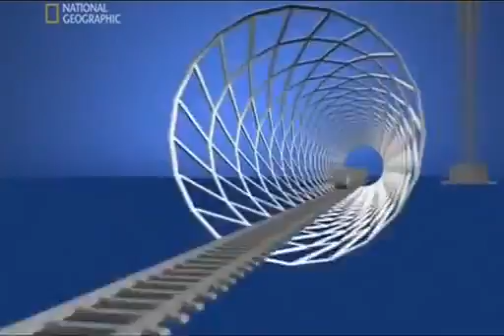In 1994, construction begins on what is planned as the world's tallest and most luxurious hotel. The pressure is on from day one. With the eyes of the world watching, no one on the project will want to disappoint this particular client.

Sheikh Mohammed bin Rashid Al Maktoum, Dubai's crown prince, is the visionary behind this amazing building. The project is his response to the economic time bomb his country confronts. As his close advisor, Sultan bin Sulayem knows all too well. He knew that we don't have oil. He knows that oil is going to end someday. And they have two choices: either go and do something about it and find other alternative ways to sustain the life for the people of Dubai, or sit waiting for help.

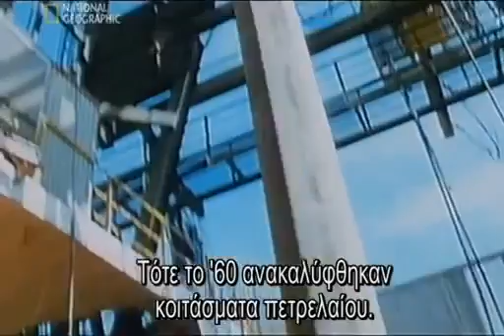Only 50 years ago, Dubai was a dusty backwater, home to pearl divers, coastal traders and Bedouin. Then, in the 1960s, prospectors discover oil. The sudden injection of billions of petrodollars transforms the sheikhdom. But geologists predict the oil boom will be over by 2016. The good life could end just as quickly as it began, when the wells run dry.

The answer to Dubai's economic survival lies in its geography. This tiny emirate, less than twice the size of London, is in the remote Arabian Gulf. But Dubai has three untapped assets: sun, sand, and sea. Facing future economic meltdown, Sheikh Mohammed makes a crucial decision. He will turn his country into one of the world's most exclusive holiday destinations, a playground for the rich on the Arabian Gulf Coast. The Sheikh needs a luxurious centerpiece to launch his country into high-end tourism.

He stakes what some speculate as over $1 billion on the tallest, most lavish hotel in the world, with a unique 7-star reputation, the Burj Al Arab. I think it was very important to put Dubai on the map of the world. There's no hotel like this hotel. It takes guts, and Sheikh Mohammed has a lot of guts.

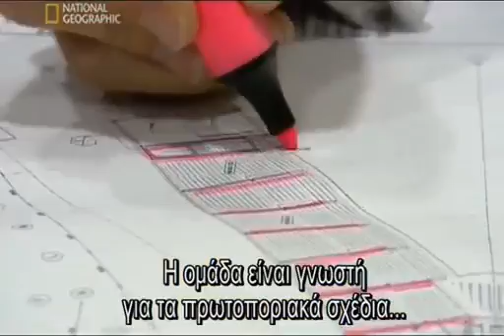The Sheikh's courage is clear from his choice of architects, a radical young team from Britain, brave enough to take up the challenge, but very short on experience. They are led by Chief Architect Tom Wright. We had an average age of 32, not a grey hair between us, and none of us had gone over about 15 stories. I was quite staggered by the scale and the immensity of the project. Tom Wright and his colleagues have a reputation for innovative engineering, but they're more used to designing schools and offices.

But Dubai is a place where connections can make all the difference. Through a contact in the ruler's office, the team gets its break. Sheikh Mohammed agrees to a meeting and is so impressed with their initial concepts, he awards them the contract. Now Wright must turn his sketches into a design so remarkable, the building becomes a world-renowned landmark. We had many sleepless nights worrying that the building we'd designed wouldn't turn out to be at all iconic.

Wright knows he must push his design to the limits. A building only becomes an icon when its form is simple but unique. We decided that if you could draw a building simply with a few strokes of a pen, and it was instantly recognizable as not only the building, but the place, Egypt in this case, you'd created something that was iconic.

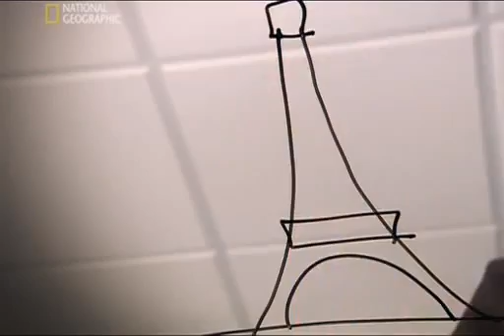So if you consider the buildings in the world, there are probably no more than 10 maximum that have actually achieved this status. Australia, Sydney Opera House. As with all these buildings, it's usually just the first couple of lines that actually make you know exactly where the building is. Paris, and you have to put a flag on the top. Can Tom Wright and his team compete with the likes of Gustave Eiffel? This is a once-in-a-lifetime challenge.

All the brainstorming pays off when Wright finally has his eureka moment. We were sitting there having a beer, watching the modern sailing yacht come out of the Dubai Offshore Sailing Club. You think of excitement, you think of exhilaration, and we went, hey, this must be the one. The form we came up with is very simple, and within a few lines, I think you can see that it has all the elements of an iconic building. It's simple and instantly recognizable.

The concept immediately catches the Sheikh's imagination. A sail billowing in the wind has deep meaning for the people of Dubai with their seafaring heritage. To complete the nautical image, Wright wants the structure to rise out of the water like a massive yacht.

But this will require an island as a base, and there are none. Wright's undeterred. He proposes they build an island specifically for the hotel, a first for Dubai. Constructing the hotel out at sea will significantly add to the risk and cost.

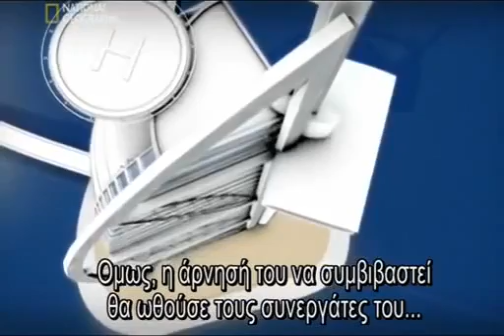By early 1995, the construction team is hard at work on Phase 1, building a low-lying island. But the inexperienced architects are about to get a taste of Dubai's extreme weather. April the 27th, a powerful storm known as a shamal sweeps across the Gulf, hitting the coast with a vengeance. A set of construction barges lie in its path, each laden with 10,000 tons of rock.

The architects have planned for all weather conditions, but the storm's intensity still shocks Simon Crisp. We had 3 or 4 metre waves bashing onto the beach. To see the waves coming in like this was really quite a wake-up call for us.

One huge barge breaks loose and slams into the mainland. The team realizes the damage this kind of storm could inflict on their island hotel. We had a really graphic example of how powerful the Gulf of Arabia can be when it's angry. The architects' decision to expose their structure to these forces could have serious consequences. The engineers will have to struggle to produce a low-lying island capable of resisting nature's fury.

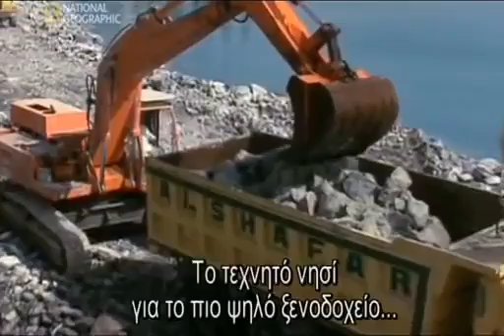The man-made island for the world's tallest hotel has hit a critical stage just 5 months into the build. Dubai's Sheikh Mohammed is depending on this project, the Burj Al Arab, to convert his country from oil producer to top-class tourist destination.

But a debate rages over the island's height. Architect Tom Wright wants to make it low to give the impression of a sail rising out of the water. We argued a lot about the height of the island. From a design point of view, I wanted people to be close to the sea.

From the start, he's gone head-to-head with engineer Mike McNicholas, who's responsible for the island's safety. So I wanted the island as low as you possibly could, you know, skimming the sea. I'm coming from the other end, needed to make sure we were protecting the island. McNicholas's worst fear is that waves breaking over the island could damage the hotel or even drag guests into the sea.

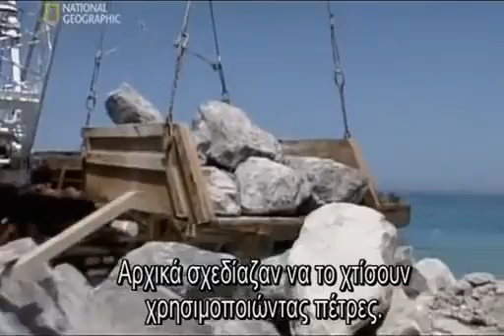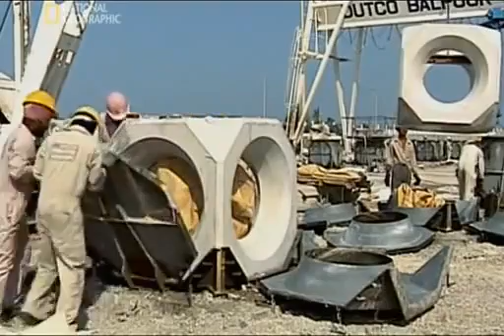Initially, the engineers planned to build the island using rocks. They are available locally and the technology is proven. But Wright rejects this. A rock island would have to be far too large to repel the sea safely. To keep the island low, McNicholas experiments with pioneering concrete blocks designed to reduce the impact of waves.

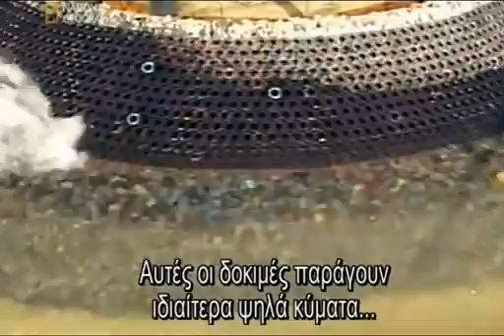But no one in the Gulf has ever used these blocks before. I had to insist with the team that we carried out tank testing. It was the only way we were going to be sure that the island would be safe. These tests replicate the power of the tallest waves that can occur once in 100 years and sends them crashing into a series of differently configured models. 3 weeks of testing prove the hollow blocks will work.

The construction team builds the island with steep rock slopes, then covers them in concrete armor to absorb the force of the waves. These ingenious blocks work like a sponge. As the wave hits, the water passes inside the space and turns around on itself. The force is largely dissipated.

With the engineers' help, architect Tom Wright has won his battle for a secure island that rises only 7.5 meters above the waves.

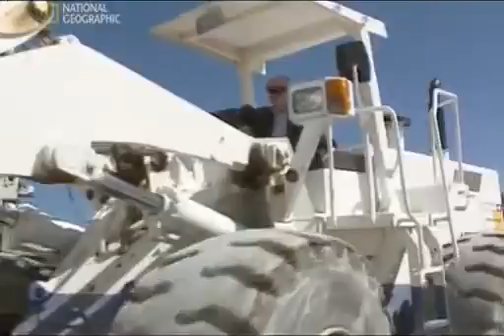Now the team begins the second stage of construction. In the center of the island, construction workers drive huge lengths of steel 20 meters into the ground. This creates a triangular steel wall known as a cofferdam, which will become the outside of the hotel basement once they excavate the sand from inside.

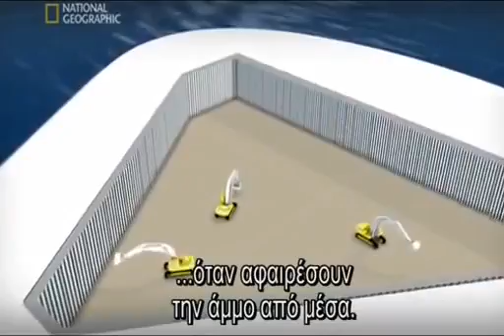But removing the sand could be dangerous. That was a real challenge for us. It's sleepless days and nights, 7 days a week, working out how we were going to stop the seawater coming into the structure, how we were going to stop the seawater coming around our structure from beneath and flooding it.

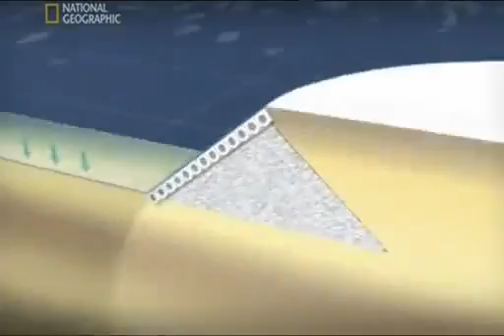The weight of the sea is a huge force on its bed. This pressure forces water through the sand and threatens to flood the artificial island from beneath.

To keep the sea out, McNicholas injects liquid cement into the sand to seal off his steel wall from below. But as the sand is removed to form the basement, there's less and less weight to hold back the force of the sea. The cement seal is going to be tested to the limit.

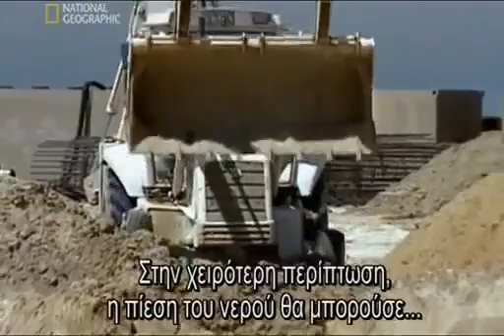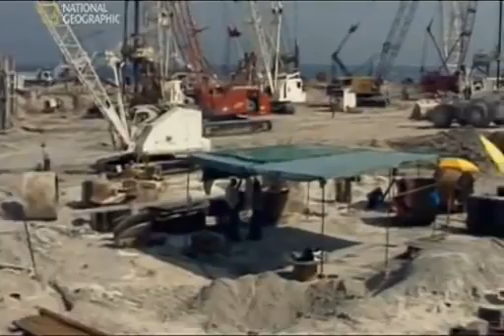In the worst case, the pressure caused by that water movement could have blown the whole bottom of the excavation like a champagne cork. If McNicholas's calculations are wrong, the excavation could be swamped, killing hundreds of workers. But he stands by his design.

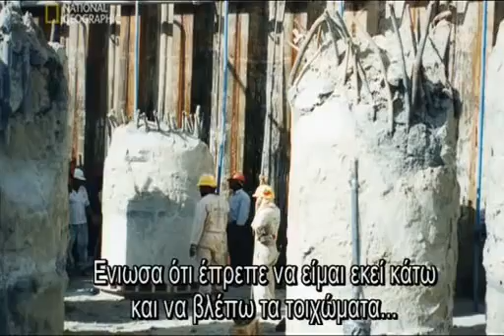With the cement seal in place, the excavators begin to remove the sand. As the man responsible, he's not going to let the workers face the risk alone. I felt I had to be one of the first guys down at the bottom of the excavation, looking up 10 meters above myself, thinking, each side of this cofferdam is 7,500 tons of sea pressure pushing in.

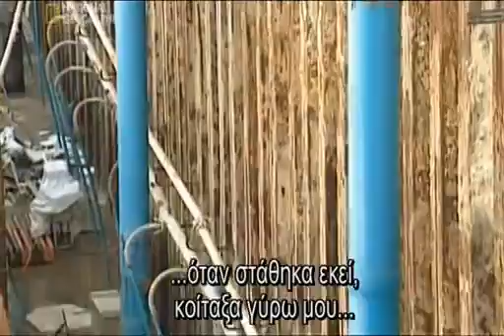When put to the test, both wall and seal hold firm. One of the probably proudest moments of my career was being stood on that excavation and looking around and seeing the steel wall there surrounding me and thinking, we are holding back the sea. My design worked.

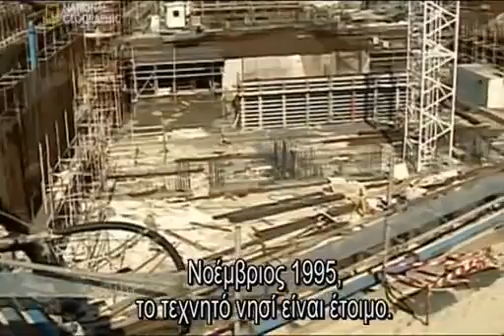November 1995. The artificial island for the tallest all-suite hotel in the world is now complete. The construction team starts phase 3 of this one-off project, the foundations. The support needed for any skyscraper is vast.

But the location of the Burj Al Arab presents an added challenge. It's never been done before to build something like this on reclaimed land. We're talking about a 300-metre high tower on a man-made island in 6 metres of the Arabian Gulf.

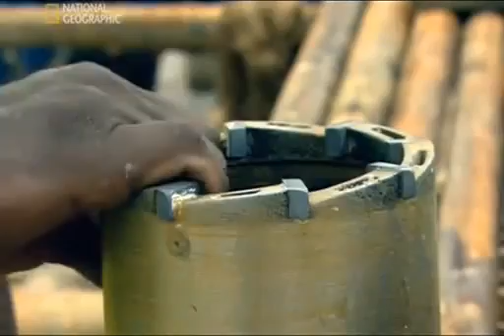The problems multiply when the results of earlier core tests reveal bad news. The team searching for bedrock drilled deep into the seabed. But even a full 180 metres down, there was no solid rock.

This will make their job tougher, but the architects remain defiant. The average person would think we're crazy to build something like this on sand, let alone out in the water. How will this 300-metre structure stand firm against earthquakes and winds of close to 150 kilometres an hour when its foundations depend on nothing more substantial than sand?

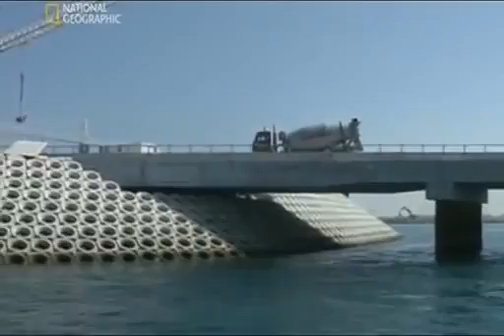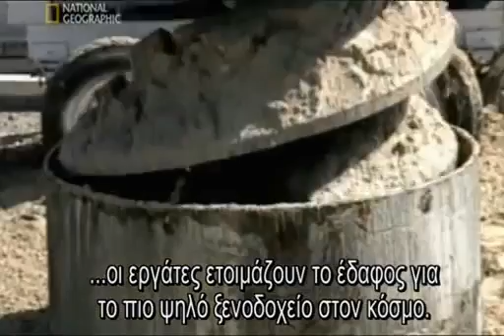On an artificial island 270 metres off the coast of Dubai, construction workers are preparing the ground for the tallest hotel in the world, the Burj Al Arab. But there's no bedrock beneath the site to support the foundations for a skyscraper.

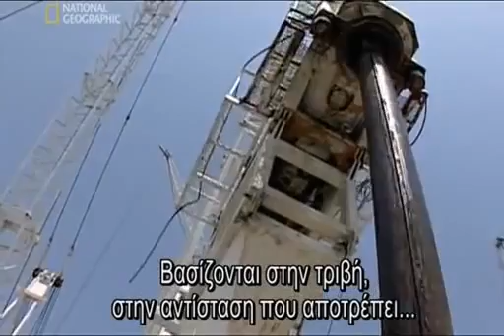The architects have a plan. They want to support the Burj using steel-reinforced concrete foundation piles drilled deep into the sand. So what's to stop the whole structure from just sinking? They are relying on an effect known as skin friction, the resistance that stops two rough surfaces slipping past each other.

Skin friction is all about the contact between the sand and the surface of the pile. And the longer the pile, the further in the ground it is, the greater that effect. I'm going to demonstrate it now by whacking it in. You'll see it starts to move quite quickly with the first few impacts. Now it's starting to stiffen up a bit, even though I'm not hitting it any harder or any softer, and the skin effect is starting to really kick in here.

Once the friction between the post and the sand around it equals the load of the hammer, the post comes to a halt.

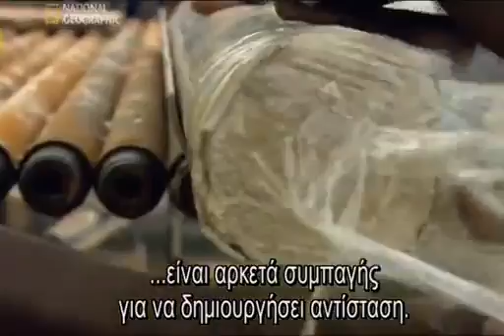The geography of Dubai gives everyone reason for concern. It lies within range of a major fault line, so this soaring megastructure could be vulnerable to earthquakes.

In June 1964, a 7.5 magnitude earthquake hits Niigata in northern Japan. Because the area is built on sandy silt, the tremors flip over entire apartment buildings. This isn't normal earthquake collapse. It's a devastating phenomenon known as liquefaction.

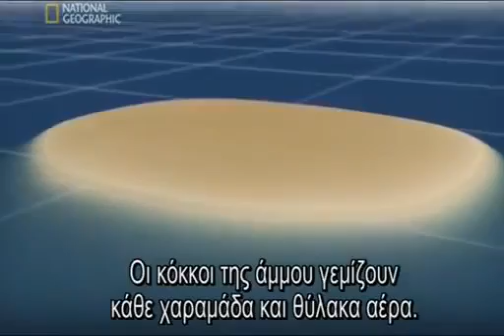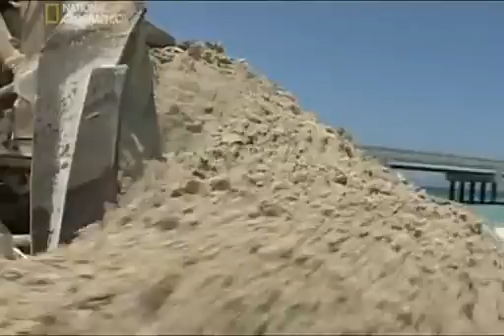As grains of loose sand shake, they fill up any air pockets and compact, taking up less space. The ground stops behaving like solid earth and acts like a liquid. On shifting sand, any building could simply topple.

When the results of the drilling tests return, it's good news. Deep beneath the site, they find compacted and calcified sand. Liquefaction is not a threat.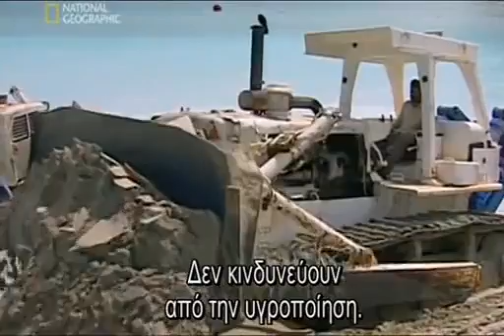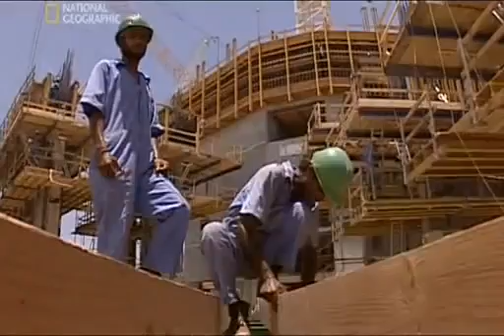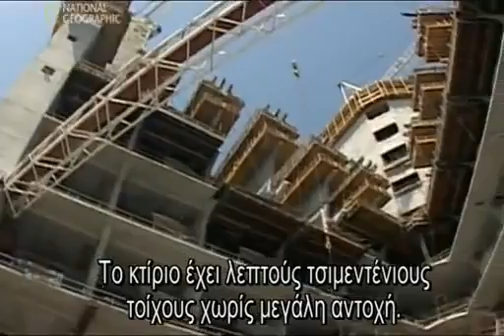This building had to stand up to the worst that the Gulf could throw at it. The hotel itself has slender concrete walls, not capable of withstanding the elements alone. To hold them firm against high winds and earthquakes, the architect devises a visually stunning solution.

A gigantic steel structure outside the main building, known as an exoskeleton. A series of vast diagonal trusses tie two huge steel bows to the concrete core at the back of the building. Wright's design will make the building unique.

But his giant diagonal trusses will make life hell for Anthony McCarter, the engineer who has to make them work. Those trusses gave me 4 months of heartache, sleepless nights, worries, anxiety.

They must be incredibly strong to tie the exoskeleton together. But aesthetics are just as vital. It was critical that these diagonals were very, very elegant and also very beautiful as they're so visible.

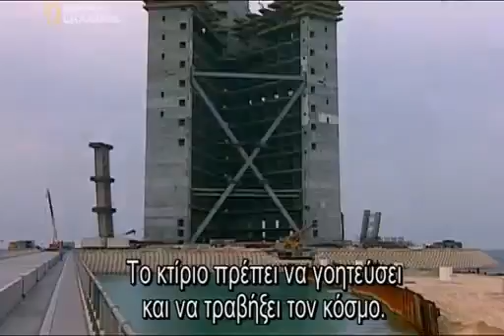This building has to wow the world and make Dubai a must-stop destination. Wright's not about to compromise. I used to go to Tom with option after option. I remember one particular occasion where I had 7 options and he went, no, no, no, no good, no good, no good.

Eventually, McCarter finds a form that works structurally and is graceful enough to fit Wright's vision. But this in turn causes nightmares for Malcolm Murphy, the chief contractor. It's okay for the architect to draw pretty pictures, but we have to build it.

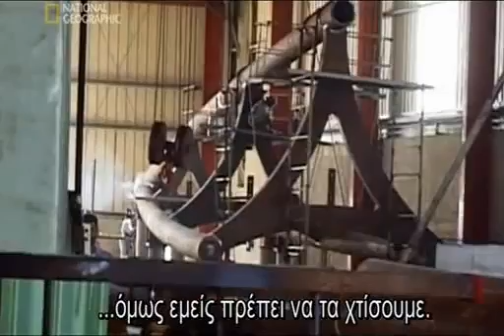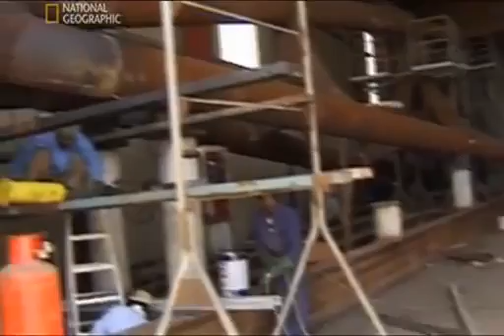He finds a factory just 15 kilometers from the construction site capable of welding the huge diagonals. Each one is longer than the Airbus A380 Super Jumbo and heavier than 20 double-decker buses. Welding these complex forms in the factory is the easy part.

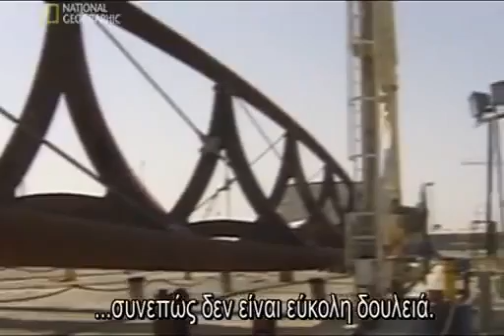Transporting them to the site is not. With each truss weighing in at 165 tons and reaching a staggering 85 meters in length, it's no easy task. And the challenge is to do that. It's just unbelievable.

No one has ever transported anything this size before in Dubai, but Murphy's not going to be beaten. He brings in one of the world's largest heavy lift transporters, a beast with a total of 80 wheels. It makes the slow journey to the construction site at an average speed of around 6 kilometers an hour. Police must close roads and remove traffic lights to allow this convoy through.

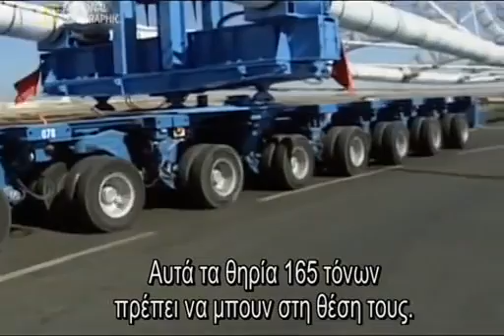When they finally reach the site, the contractors face their next hurdle. These 165-ton beasts have to be lifted into position. The architect refused us point blank to position these things in 3 pieces, which we wanted to do originally. And he said, no, aesthetics, I'll not let you weld up there.

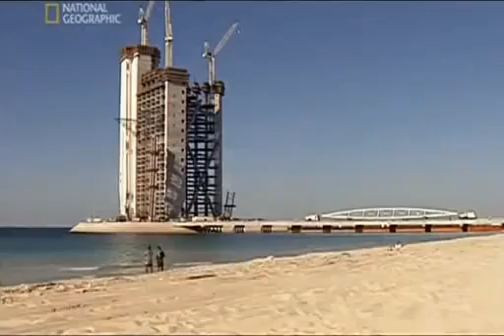He has to find a way to lift the trusses in a single piece to a height of almost 200 meters, twice the height of the Statue of Liberty.

We had to go away and think of an idea how to actually lift these monsters up. We had 3 big monster cranes in there, and even they weren't big enough to lift the diagonal trusses.

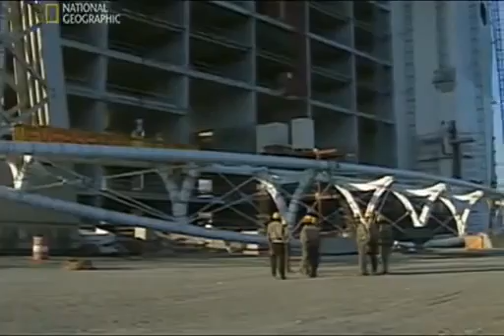Murphy must look further afield for a solution and brings in specialist lifting gear from Singapore. His team sets up winches, like those used on offshore drilling rigs, high on cantilever frames 15 meters from the building. Cables with a breaking strength of 225 tons are attached to the end of the truss.

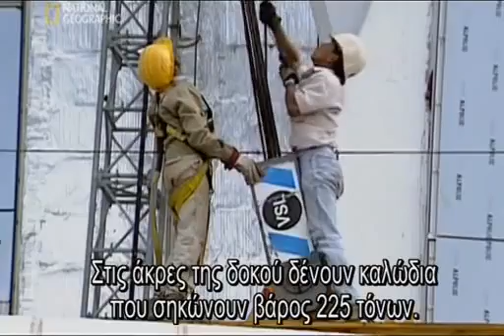I can assure you we were very, very nervous that morning when we lifted the first one. 30, 40 guys had sleepless nights that week, getting ready for that first lift.

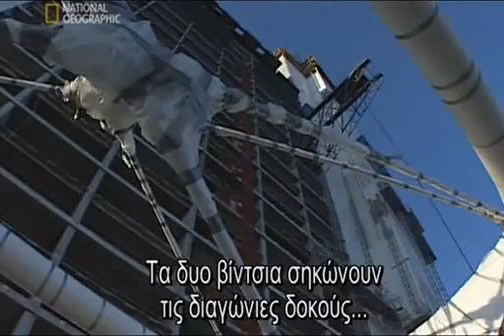The 2 massive winches take up the strain and then painstakingly raise the diagonal truss little by little up the side of the building. It's all going to plan.

Murphy and his team have solved the lifting dilemma, but these trusses have a sting in the tail. They need to fit into place with pinpoint accuracy. But Dubai's climate means temperatures can vary by as much as 14 degrees in a single day, and this will make the trusses expand and contract dramatically.

The problem's known as thermal expansion. The steelman's nightmare in the desert, working at 50 degrees C. Steel expands in the heat and contracts when cold.

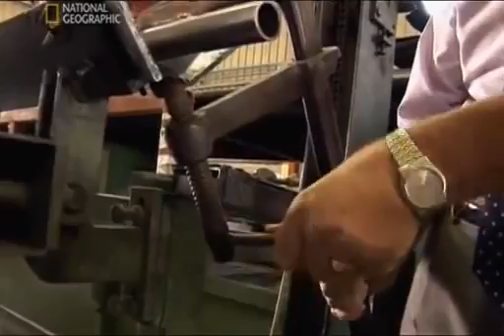Okay, chaps, light up. We're actually going to heat the steel up now, which is going to give you an idea of what temperatures we're working in the desert.

Heat makes the steel molecules move faster and further, and this 15-meter tube actually grows in length. The difference is visible. What did I tell you? Steel does expand with the heat.

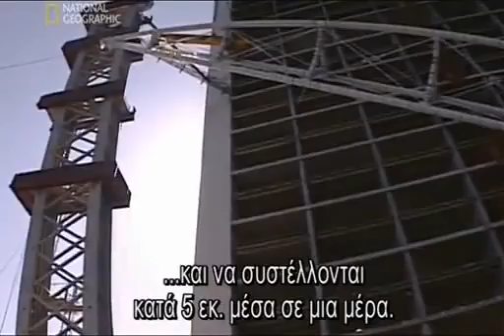The diagonal trusses on the Burj Al Arab could expand and contract by a full 5 centimeters over a 24-hour period. They will never fit their precise point in the framework without an ingenious solution.

The engineers thought about it, the structural fabricators, the steel fabricators, the architects, everybody thought about it, and it was actually one of the architects who came up with this great solution.

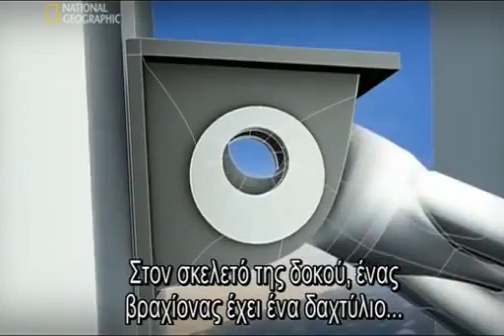On the frame of the structure, the fixing bracket contains a vast washer with its hole offset from the center. This swivels until it lines up with the hole in the diagonal truss. Then the cast steel pin, about 30 centimeters in diameter, is inserted through both holes, locking them together.

This clever device buys the team the crucial 5 centimeters of play they require for the installation, and the truss is now fixed securely in place.

When we got that pin in, we had those champagne corks flying. It was just unbelievable. But there's precious little time for celebration.

The first VIP guests will arrive before the millennium. This leaves the team less than 36 months to complete the entire project. Sheikh Mohammed's vision for the Burj Al Arab meant that it was needed yesterday.

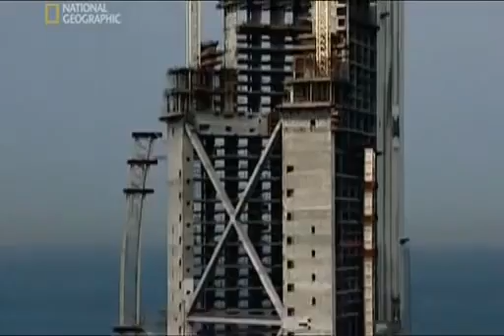January 1997. A colossus is emerging out of the Arabian Gulf. The Burj Al Arab is to be the tallest hotel in the world, the last word in luxury and a proud symbol for Dubai.

Architect Tom Wright wants the building to be beautiful. The steel sections of the exoskeleton that will support it must be as minimal as possible.

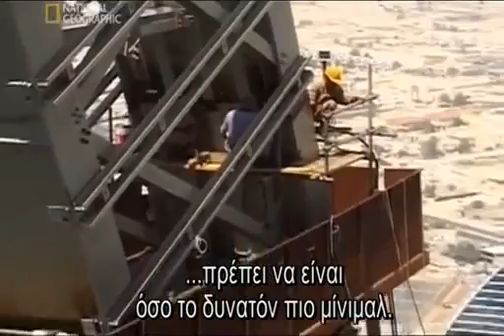The view from these $2,000 a night suites will have to live up to the price tag. When you're in the suite, looking through the windows, they are right in front of you, so they have to be exceptionally well detailed and well put together.

But this creates a dilemma. If Wright makes the exoskeleton too light, the wind's force at 300 meters above the Gulf could shake the building apart. Too bulky, and the elegant form of his yacht-shaped structure is ruined.

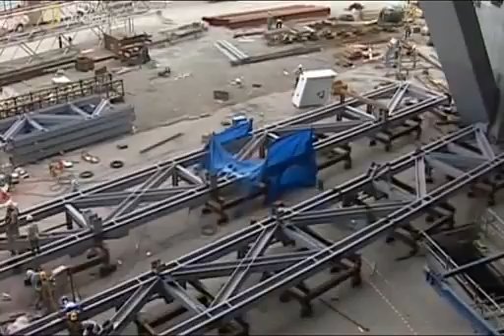Once again, Wright and the engineers, who must make his hotel safe, are on a collision course. When you're designing a building that is taller than the Eiffel Tower, and you've never done one before, you want to make sure that you've got it right.

This structure is so unusual. For the first time in Dubai's history, engineers decide to do tests in a wind tunnel.

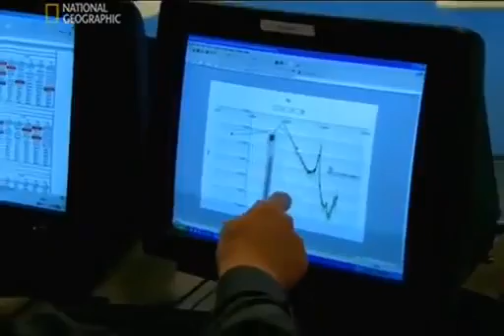Wind engineer Volker Buttgereit knows the Burj Al Arab is one of a kind. Before this building came along, most of the buildings in the Gulf were fairly orthodox shape. They were square, they were rectangular, they were nowhere near this scale. So doing a wind tunnel test for a building in those days in the Gulf was almost outrageous. But for this extraordinary structure, it's essential.

The wind tunnel simulates the wind effects of the Gulf around this 1:50 scale model. This building has seen some pretty severe loads, almost twice what it would see in London. We measured suctions which were the order of the weight of a car hanging off, trying to suck the panel off the building. So that's quite something.

The wind tunnel throws up results that could threaten the entire exoskeleton. When we first saw the design, there was immediate concern about vibration due to something called vortex shedding. Vortex shedding is an engineer's nightmare. Certain wind conditions blowing over sharp edges on the steel structure can create miniature tornadoes. These set up dangerous vibrations that can shake a building to destruction.

Which is exactly what happened to these massive cooling towers in Ferrybridge, Northern England in 1965. The engineers must find a way to protect the Burj Al Arab.

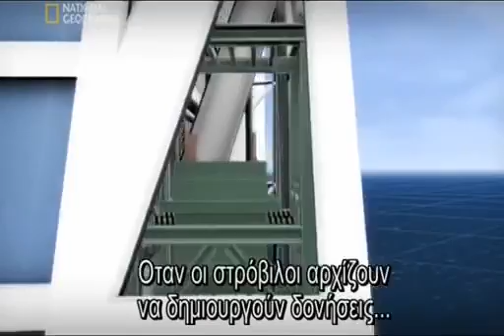They turn to an ingenious hanging weight called a tuned mass damper. These are installed at vulnerable points in the exoskeleton. When the wind blows and vortex shedding starts to create dangerous vibrations, the 5-ton weight will swing instead of the structure and damp down the vibrations to well within safety limits. 11 of these systems are fitted from the top of the 60-metre mast all the way down through each of the steel bow structures. These dampers safely cancel out the threat.

June 1997. Dubai is reinventing itself as the luxury tourist destination. This old hotel bites the dust as the Burj Al Arab, the symbol of the new Dubai, approaches its final form. Just 30 months before the deadline, the crew begins constructing the toughest engineering challenge.

Sheikh Mohammed wants the building to amaze. So the design calls for a restaurant that looks as if it's suspended in the sky. I like the idea of the visitor sitting out in space, looking across the view towards the Arabian Gulf and Dubai, and sort of almost floating up in the clouds. The whole idea of hanging out over space would give you a dining experience pretty unparalleled.

The Al Muntaha, or Ultimate Sky View Restaurant, will soar 200 meters above the sea and project nearly 27 meters out on both sides from the building's narrow central core.

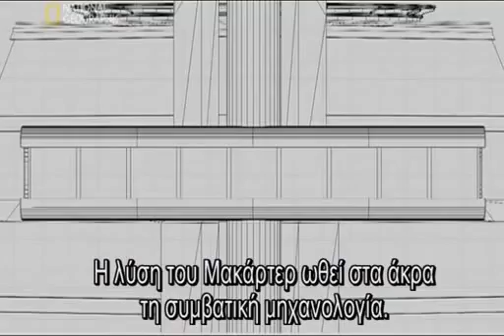And if the engineers get the calculations wrong, the whole thing could tumble 200 meters to Earth. McCarter finds a solution to the pull of gravity that pushes conventional engineering to new heights.

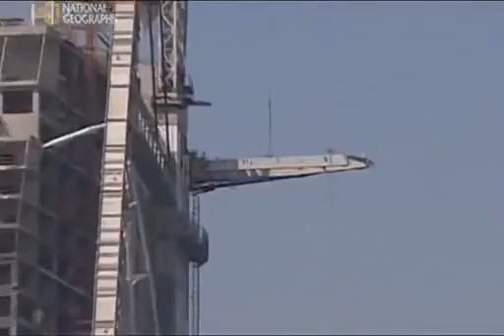In the concrete core at the back of the building, he casts a series of steel brackets known as embedments. 10 enormous steel girders radiate off them up to 1.6 meters high. These beams form the base of the rigid steel floor. The wing-like exterior can be attached to it, and then the entire restaurant is enclosed in aluminium and glass. This gravity-defying structure will survive winds of close to 160 kilometers an hour. It's an engineering triumph.

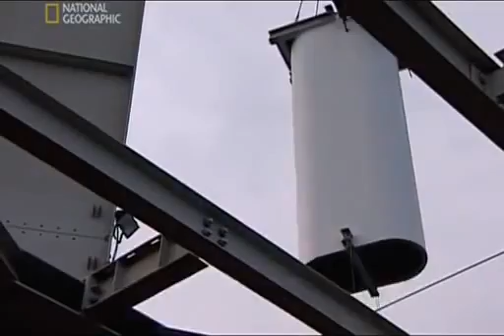But they are just 4 years into the 6-year program. No one can afford to take their foot off the gas. The program was relentless and challenging. 24-hour working, 6 o'clock site meetings in the morning, every morning. You live, sleep, breathe the building. The challenge really was on: can we design it and finish it by the original program?

The Burj Al Arab is due to open in time to celebrate the millennium, just 2 years away. The world's media are watching to see if the hotel will be the masterpiece the Sheikh promises, and if the team can complete it on schedule.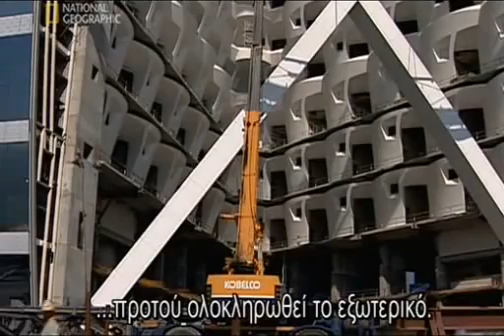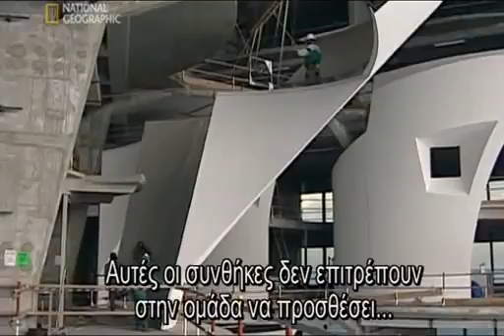The only way to deliver on time is to start the interior decoration long before the exterior is finished. In a temperate climate, this wouldn't be an issue, but humidity in Dubai reaches 100%, and temperatures can soar to a scorching 49 degrees. These conditions simply won't allow the team to fit delicate finishes like gold leaf, silk, and carved wood.

If they'd started to put in materials susceptible to moisture at that time, they would have just fallen apart. To make the deadline, the contractors need to air condition this giant building site and bring the temperature down dramatically.

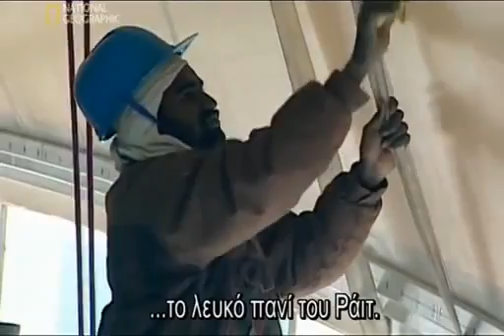The first step is to enclose the building by installing the final wall, Wright's iconic white sail, but it's going to be tough. They stretch woven glass fibre sections between huge horizontal beams. The surface is pre-coated with Teflon to resist dirt and sand.

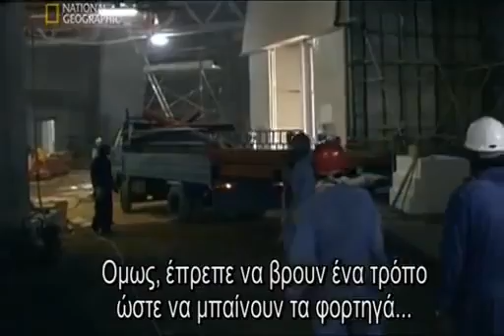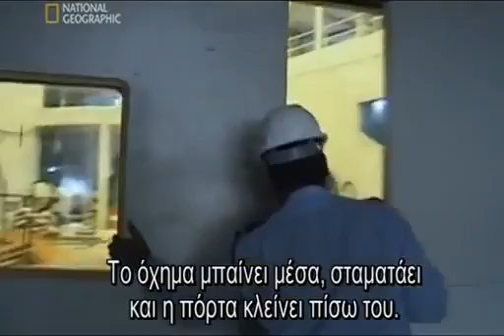The result notches up another first for the Burj, the largest fabric wall anywhere in the world. The reflective properties of the white sail will help keep the temperature down. But the contractors still need to find a way for trucks to enter the building without letting in the desert heat. The solution is to install a huge airlock. Trucks drive in, the vehicle pauses as the doors close behind it.

A second set of doors then open, and the vehicle moves out of the building. The airlock and the sail wall now seal off the building. But cooling a space this large during construction could create a major setback.

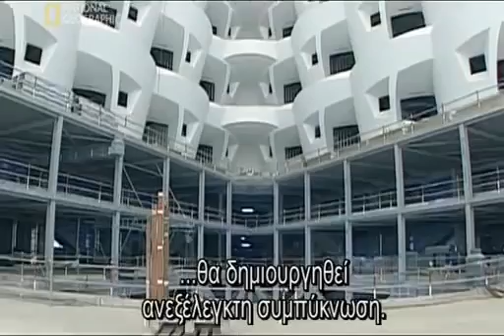This unique structure now boasts the world's largest atrium, soaring to an amazing 180 meters. All this warm air can hold far more water vapor than cold air. If they cool this hot, humid environment too quickly, they will create uncontrollable condensation. We could have had a rain cloud form at the top of the atrium and create massive damage to the interior design.

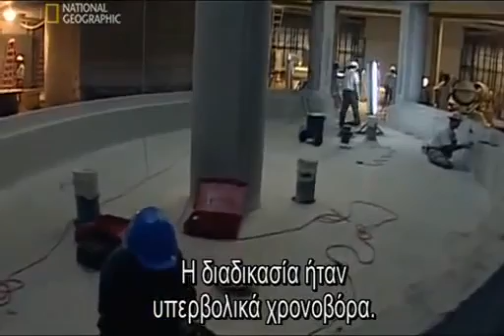The only way to avoid rain clouds will cost valuable time. The contractors switch on the giant cooling system and bring the interior temperature down steadily by less than 1 degree a day. Given the schedule, it's painfully slow. We started to cool the building down in June 1998. By December '98, it was pretty well down to temperature.

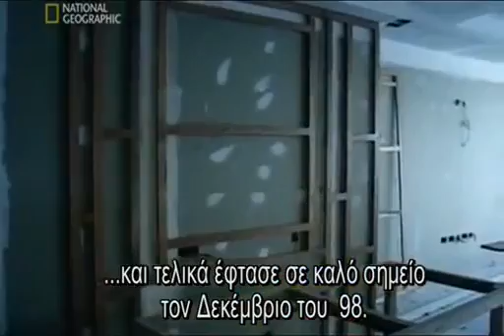At last, the interior decoration can begin. But the hunt for a designer who can create interiors worthy of a sheikh causes further delays.

Khuan Chew, who's already worked for the Sultan of Brunei, knows exactly what it takes to satisfy royalty. It's great news when she agrees to take on the most luxurious hotel on the planet, with its daunting 202 palatial suites and the 180-meter atrium. But she has just 24 months from design to completion to be ready for the guests booked in for the millennium. I had a very, very tight program.

So what we did was the entire office, all 50 designers, just dropped everything else. Solidly, we just worked on the Burj Al Arab. She not only faces a frantic schedule, Sheikh Mohammed is expecting her to amaze the world. The brief basically asked us to design something that's never been ever designed before and that will never be designed ever again.

Khuan Chew and her team pull out all the stops and begin to produce interiors they hope will match the Sheikh's ambition. But as they struggle to meet the deadline, another more severe problem comes up. The Sheikh wants to offer guests every conceivable electronic gadget in their suite.

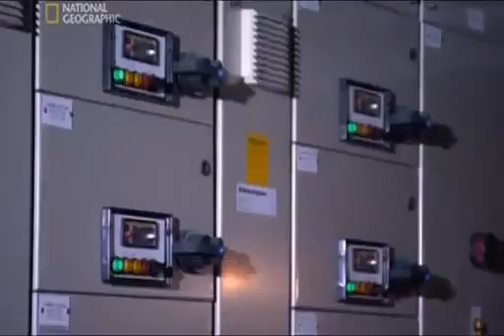The Sheikh's new plans mean each suite requires an enormous 14 kilowatts. That's 8 times the load of a normal European house, for every suite. With 202 suites, that's roughly enough electricity for a town of over 6,000 people. The hotel will have electric curtains throughout, 52,000 lights, most of them on dimmers, and over 5,000 kilometers of electric cable.

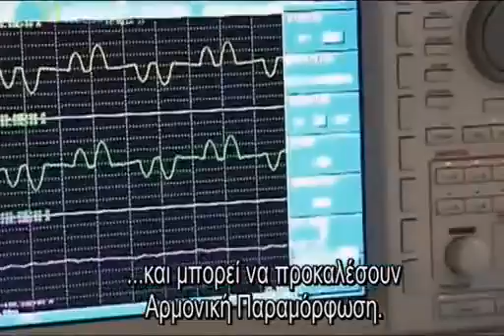All these electronics can scramble the waveform of the electric current and create a problem known as harmonic distortion. This can melt the sheathing around live cables and cause a raging fire. That was a situation which was just totally unacceptable. We had to deal with that.

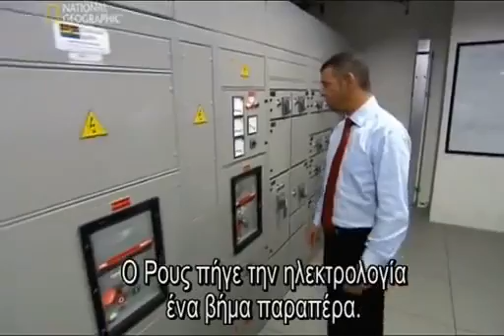His response takes electrical engineering to a new level. He devises a harmonic filter system. First, it detects the electronic distortion, then it sends a current that's the mirror image to cancel it. It's called antiphase and works like noise-cancelling headphones. He installs his filters on key floors and at the point the electricity enters the building.

No one has ever attempted a system on this scale before. This was the largest active filter installation of its kind in a building like this anywhere in the world. A world-class solution for a world-class megastructure. Dubai, April 1999: the world's tallest and most opulent hotel is approaching completion.

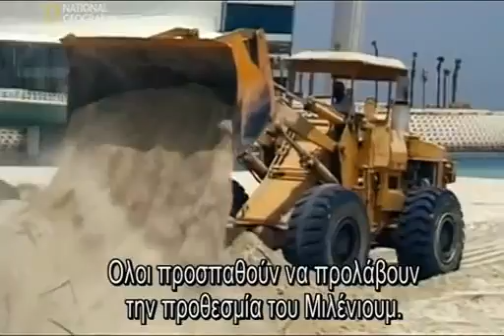Everyone is rushing to finish the hotel, ready for the Millennium deadline. Interior designer Khuan Chew is still operating in overdrive. Christmas was cancelled, Easter was cancelled, bank holidays were cancelled. We basically made 50, 60-hour weeks.

Her brief from the Sheikh is to shock, to innovate, to amaze the guests with a modern Arab palace. And she delivers in spades with over 24,000 square meters of marble from Italy and Brazil, the equivalent of nearly 3 soccer pitches. Over 8,000 square meters of 22-carat gold leaf give the desired impression of luxury. And she completes the appearance of total indulgence with crystal chandeliers, woven silver and velvet.

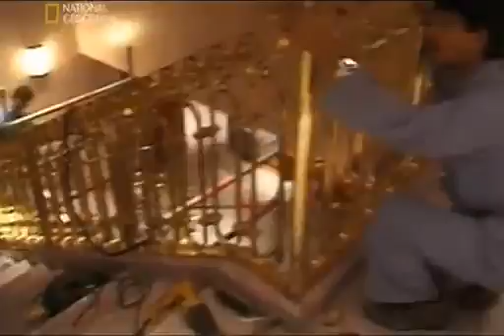But for the world's largest atrium, Khuan Chew makes a radical decision. She goes minimalist, letting the complex architecture speak for itself by painting it all white. The interior decoration is almost back on schedule.

Then comes the moment of truth. Sheikh Mohammed arrives to examine her work and pass judgment. The man behind the whole project is delighted with the ornate styling of the luxury suites. But that's where the good news ends.

I was summoned and said, when are you finishing off this atrium? I said, well, it's nearly done. Unfortunately, the feedback was no. Where's the color? The Sheikh completely rejects the white styling of the atrium. It's just too plain. Not exciting enough, not bright enough, not colorful enough, not rich enough.

Khuan Chew has to completely redesign and decorate the tallest atrium in the world in just 6 months. I was basically living and sleeping in the Burj Al Arab, rushing from area to area.

This is her last chance to get it right, so she sets out to dazzle. She designs a light show to animate the world's tallest fabric wall. Fountains create aqua gymnastics in the lobby. Vast fish tanks welcome visitors as they ride the escalators. And crucially, she transforms the view up the atrium into a rainbow palette of vibrant colors.